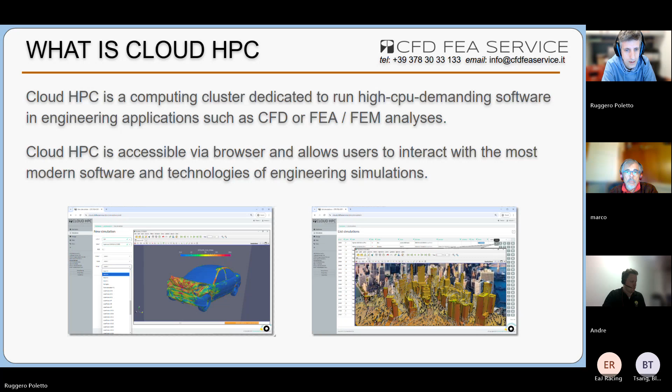So a couple of words on CFD FEA Service. We are an Italian-based company founded in 2018, and we started this service that we call cloudHPC in 2020. It's an HPC on demand. So it's basically a cluster where you can perform any type of CFD or engineering simulations with quite a wide range of software installed already in the platform. MantiumFlow and consequently OpenFOAM is one of the software installed in the platform, but it's not the only one. There are possibilities to perform FEA analysis, impact analysis, thermal analysis, and so on and so forth.

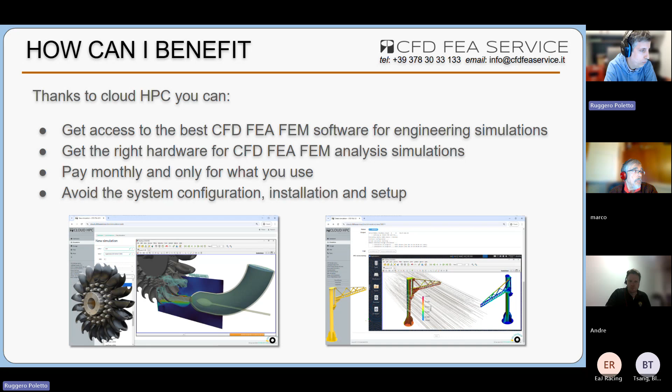The whole platform is a sort of pay-per-use system. And in the past months in particular, we worked very hand-in-hand with Andre in order to give the possibility, if you generate a simulation with MantiumFlow, to get the data, import them on cloudHPC, and run the analysis on cloudHPC. And then once the analysis is completed, download the results of the simulation.

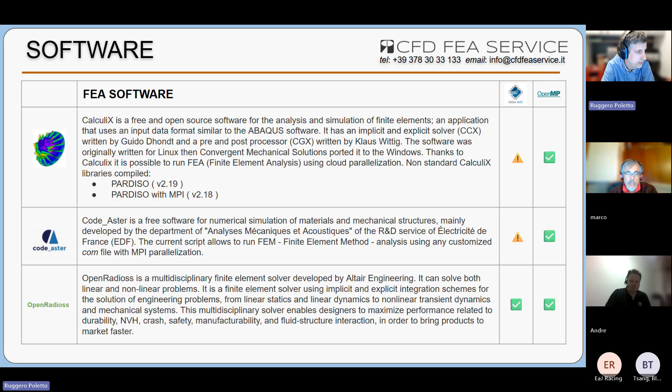So if you have troubles with any of your simulations with this software, you can write us a message and we can provide support and assistance in order to understand what the problem was. And then many others. Just talking about SU2, another CFD software, Salome Meca, which can be used to generate meshes, EnergyPlus, Scilab, TensorFlow, if you're a Python maniac and want to implement your own Python script or artificial intelligence sort of thing, TensorFlow or PyTorch are installed. We have ParaView and several other things.

But obviously, the main topic today is going to be MantiumFlow and the Mantium Challenge. I think this is the second year we are working with Andre, and we provide the hardware. So what happens under the hood every time you submit a geometry is that Andre generates what I personally call the OpenFOAM dictionaries. So the setup of all your simulations. So every time there are 8 to 12 participants, it means that Andre generates about 10 different simulations that are going to be performed on cloudHPC.

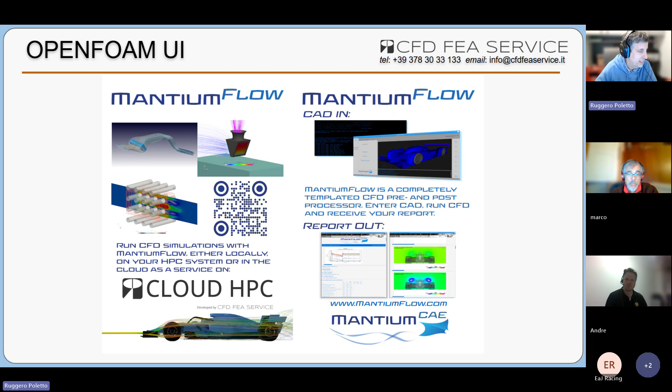Using the setup provided by Andre, the system generates the lift, the drag coefficients, and the heat transfer coefficients that are then sent over to another simulation software in order to evaluate the lap time. So every circuit has a sort of target values for lift, drag, and heat transfer coefficients, and the closer you are to the target value, the faster you'll be on the track.

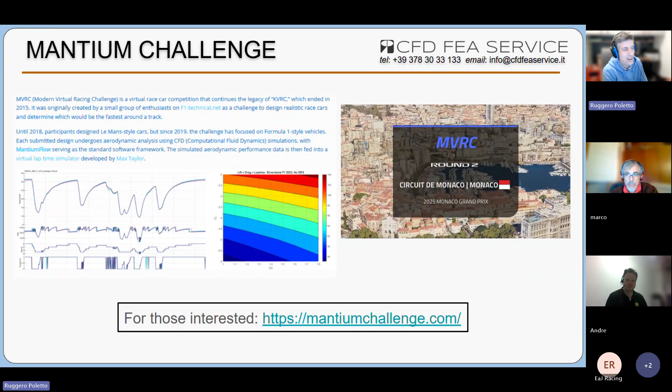So yeah, Mantium Challenge is a teamwork. This is the Monaco Grand Prix that has been performed earlier this year. I think that for every Grand Prix, Andre, correct me, but there are at least 5 to 6 people involved to generate the results, to generate the video, to calculate the lap time. So it's like a little community that all together provide some sort of service or capabilities in order to complete the simulations.

That's actually correct. It's a bit sad that we lost our guy in Australia, but the data does travel the world. So it arrives with me in Germany. I send it to you in Italy to get calculated. Then there is also technical scrutineering. We have help from Denmark, the lap time simulation in the USA. So the data does quite the travel.

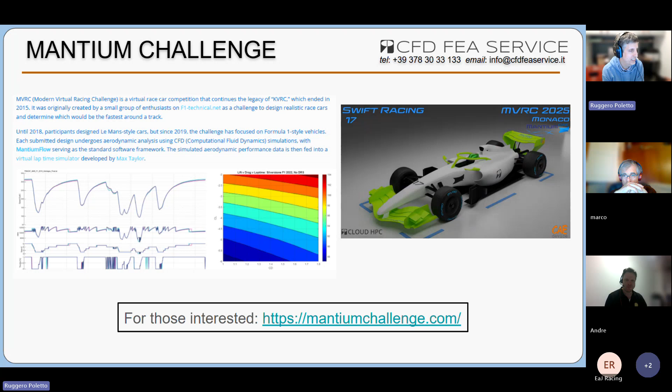It's really teamwork. I mean, Andre is great because he's coordinating all these entities, each of which does a little piece of the Grand Prix calculation. So congratulations to Andre and to his commitment to making the Grand Prix and this challenge real every month.

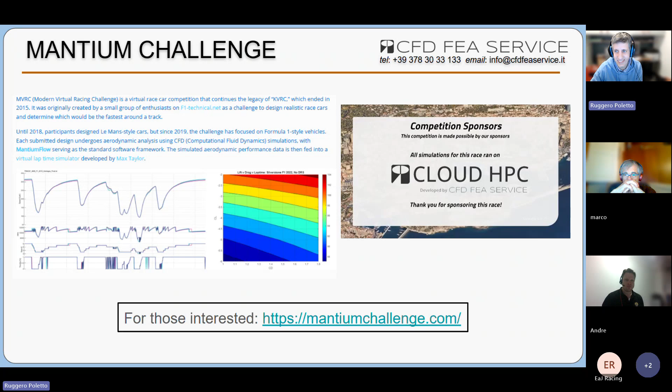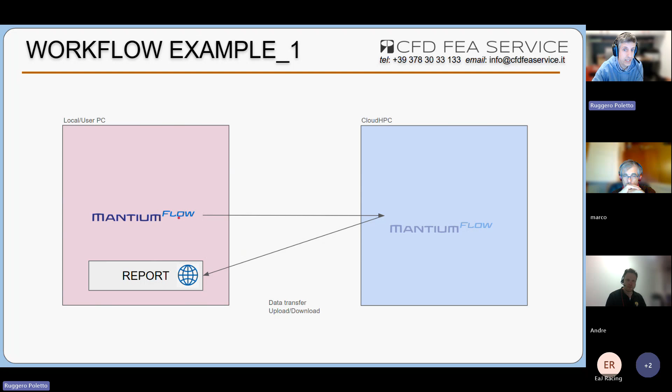Obviously, I need to generate the geometry. I need to upload that in MantiumFlow. And using that, I need to elaborate an OpenFOAM case. This OpenFOAM case is transferred on the cloudHPC. Sorry, I just do this. So CAD file, we upload it on MantiumFlow. We elaborate the setup of the simulation.

We can transfer it on the cloudHPC, where there is a combination between OpenFOAM and, it's grayed out, but there is also MantiumFlow. They are used to simulate, so generate the mesh, simulate, and that's the OpenFOAM features. And then there is a customized installation of MantiumFlow that is there to generate the report. So all the images and all the Excel files, CSV files, that are then used to extract the lift and drag coefficients for every car.

This report can then be downloaded on the local computer, and Andre then takes it and sends it over to the USA to calculate the lap time or to do his activities. So the workflow starts with a CAD, MantiumFlow, still on your local computer. You transfer everything on the cloudHPC, you submit a simulation, and then you can download the report, I mean the results of your analysis.

So these are the 2 blocks, local computer and remote hardware resources, and these arrows represent the data transfer. There are 2 main data transfers during the simulation. One is right after we set up the simulation. We upload the OpenFOAM configuration files on the cloudHPC, and the second one is once the simulation is completed, we download everything on our computer just to get the results to post-process them locally.

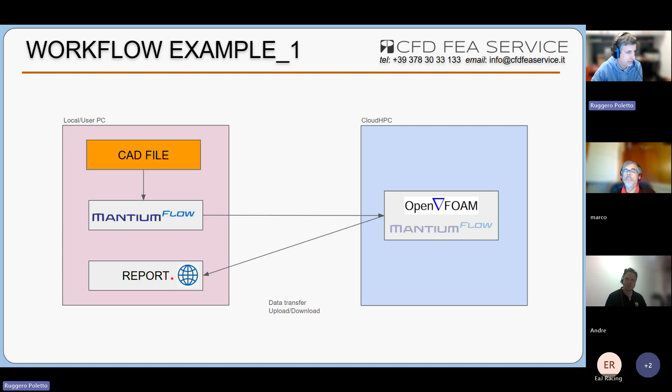All this data transfer, let's say, can be done in 2 or 3 ways. There is what I call the manual way. So using the website, you just upload the files or download the files. There is a procedure to do them via terminal. Another way is through the API, and I think with Andre, we are working on that in order to embed these API calls directly in MantiumFlow so that the user will be able from MantiumFlow to submit the simulation.

And in terms of hardware provided for every simulation, basically there are two different types of hardware. There are AMD EPYC Milan processors at 3.3 gigahertz, and that's what we call high core. And then there is the premium processor, which is the Intel Xeon Emerald Rapids at 4 gigahertz. It's about 50% to 100% faster. So this processor is like a generation beyond the first one. And this allows users really to speed up a lot the simulations.

AMD EPYC Milan has been around since 2022, I think, so 3 years ago. It's not the most recent processor, but generally, compared to the processor you may have in your computer, it's about 20% faster. It depends a little bit on your computer capabilities, but this is just to give you a ratio. So AMD Milan is a little bit faster than your computer, and Emerald Rapids is definitely a premium processor. It just came out in 2024 and will be soon replaced by EPYC Turin, which is the 2025 version of the processors.

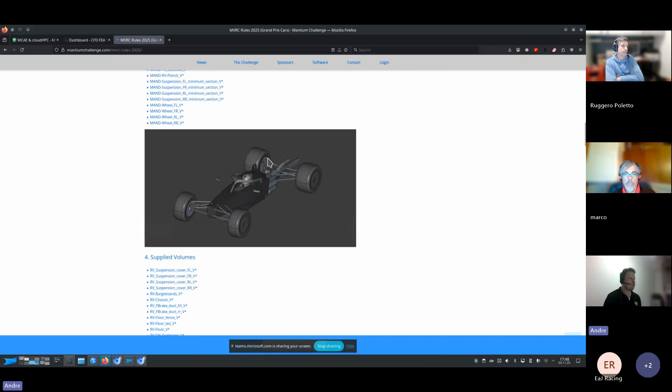We have some regulations on how you can design parts onto the cars, and there are all kinds of volumes, but to say it in a very simple way, you have to cover the internal parts and not have body parts sticking out of these reference volumes. Very simplified. At every race, a bunch of teams submit their CAD geometries to me, and they've been doing CFD simulations on them.

But now I get them and I do the reference simulation. I extract values such as lift, drag, lift balance, cooling performance, and that later goes into a lap time simulator. And for those that are not familiar, you could now download this CFD software, or actually the pre and post processor that Ruggero was talking about, called MantiumFlow.

You download it here at Files. Here you can download the CAD parts you would need for the challenge itself. However, there is also a webpage, mantiumflow.com, where you can just as well download MantiumFlow. The download button is maybe not that exciting, but you also have a bunch of tutorials.

MantiumFlow, it's kind of a misconception that it's only to simulate cars. Cars have a lot of complex parts, fans, rotating parts, porous media, and so on. So if you can simulate a car, you can simulate anything. Anyways, let's get to the actual script. So this is the graphical interface of MantiumFlow.

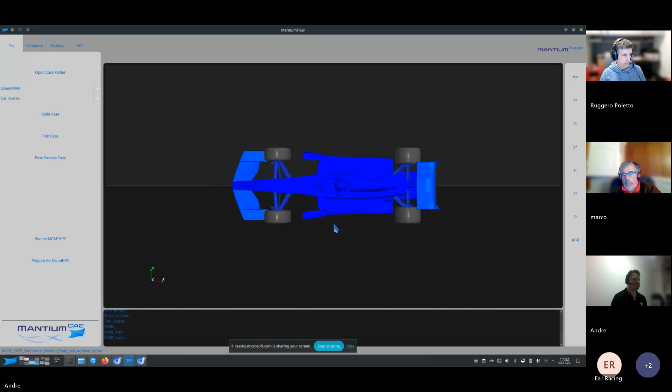Where is it? Oh, it's already this one here, webinar demo. Yes. So now you can see it has loaded the geometry. It colored it based on what type of a geometry it is. So nice enough, wheels are dark. You can see normal geometry has different colors of blue.

And now I happen to know that the lighter blue is a high resolution surface. And this blue here is just a normal resolution surface. This green is a special boundary condition. Here in a Formula One car, you have an air intake.

Now, the main idea behind MantiumFlow is you now tell it what you want to simulate. If you just download MantiumFlow, you will already have a bunch of templates. And among them are these MVRC templates. I will just choose the normal MVRC template.

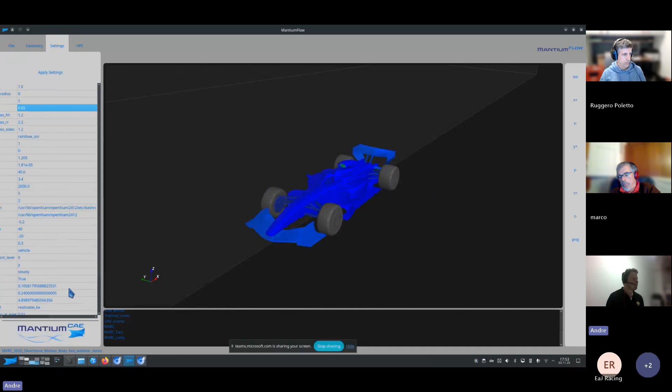And I could now click Build Case, and it will build the case so I can run the simulation locally on my computer. But if you don't like automated workflows, or you happen to know that the MVRC template just takes too long for you, you can also go into the settings. And let's say one major driver of simulation length will be determined by the mesh size.

And one of the settings to change the mesh size would be the base cell size. So I'll just increase it. Another one is how many iterations will you run? So let's say we've run this car a few times. We know we don't need that many. So let's just decrease that as well. And as a MantiumFlow user, never forget to hit the Apply Settings button.

And now we can go back here and we could build our case and run it locally. But we're here with the great sponsor of MVRC, our technical provider, cloudHPC. What we do is we say, prepare for cloudHPC. So I click that. It tells me it will prepare the case. We have to zip it up and then we can send it there. So we just hit prepare.

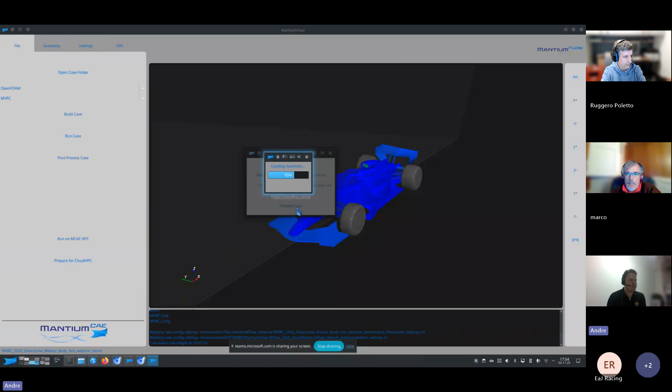And as Ruggero mentioned, obviously I need to build a direct API, so we don't have to go through this manual step that we will now do together. But it also depends on user demand. So let's see what happened. We can see now it created these other folders. So there's a system, a constant, a 0, and a postprocessing.sh file.

As a user, if you don't care about OpenFOAM, you don't have to worry about it. But if you are interested in OpenFOAM, here you can see, for example, the boundary conditions. This postprocessing.sh is a script. In this case, it's a script relevant to Ruggero's system, cloudHPC. So these commands are made for his system. If you just run them locally, they will probably not work. You would have to click build case and you can run it locally.

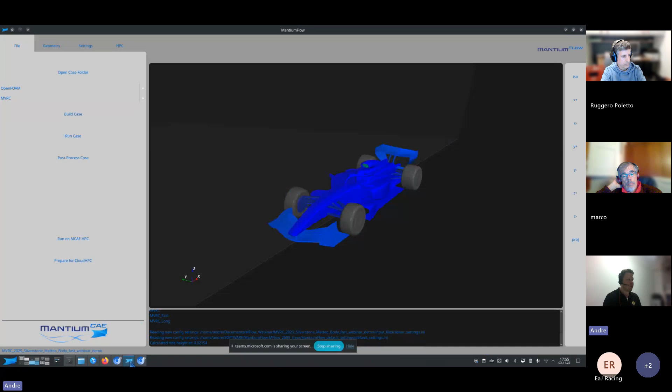Anyway, the system did tell me I can now compress this. So I'll do a tar.gz. That took surprisingly long. It's only 27 megabytes. So how can I now submit this simulation to cloudHPC? Well, I go to the cloudHPC system. I'm already logged in. And this here is my dashboard.

And what you can already see here, I guess Ruggero would later maybe tell us a bit more, but I can see here we have some simulations that I've conducted. So here you can see simulations from the Monza 2025 race. Over the weekend, to prepare for the webinar, I also simulated a case because I wondered what would happen with the simulation time if I increase the mesh size a bit and reduce the number of iterations.

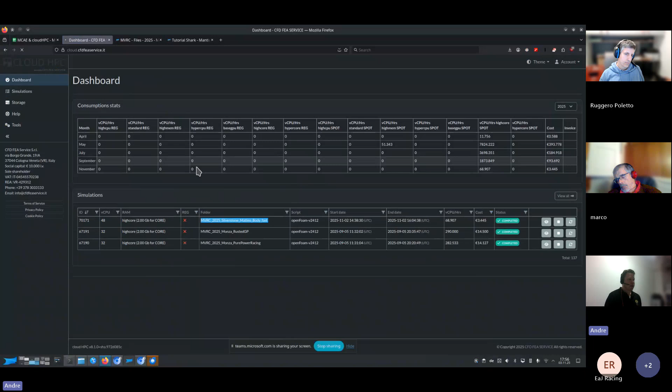So how do I submit my case now? I go to storage. Wait a second. I upload that zipped file from a second ago. No. There we go. Or no. Just do it again. Okay, there we go. Okay, 13 minutes, I don't believe it.

Okay, so now we've uploaded the case. How do we submit it? Here you can see once more old simulations. So you see we create a lot of simulations. They usually all execute in parallel. So that really helps with conducting the race weekends.

So all we now have to do to submit a simulation is we now select the CPU. How many would we run? I usually run 32, 48 because the MVRC simulations are simply not that large. They are maybe in the range of 8 million cells. So we do have to keep a balance of accuracy and approachability. Many contenders use their laptops.

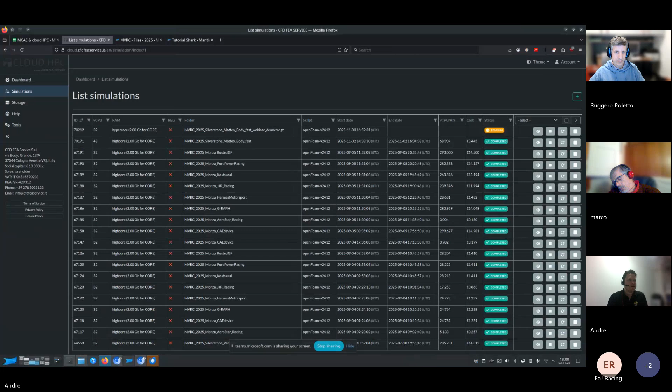Ruggero, maybe if you want, you could log on as me and show how we could monitor that the case is running. Okay. Obviously, it takes a few seconds. Let me see what else I wanted to tell you. Yeah, maybe Ruggero wants to demonstrate a little bit how we can monitor the case, or we just go right to the next step. If you give me a second, because it's still pending, there's not that much you can show right now. It takes about 2-3 minutes for any simulation to actually start. There is not really a queuing system, but there is just an allocation time for the simulation.

So I'll share my desktop. Okay, you should be able to see it. Now I'm basically following up the Mantium CAE account, so I can see all the previous analyses that have been performed in the past months for the old Grand Prix, and this analysis that's running right now. It is still pending. It takes still 1 more minute, so we'll be patient, and then we'll see what's happening.

In here, there are some controls that can be used in order to interact with the simulation. For example, if you see that the analysis is going completely wrong, you can stop it. So there is a stop button that allows you to soft stop, which means complete the current time step and save the results, or hard stop, which means completely cancel out the results as quickly as possible.

You can synchronize, because when you submit a simulation, the results are meant to appear in your storage, but they will appear only at the end of the simulation. If you are at an intermediate step and you want to download the partial results, you have to click on the synchronize button. There's no other option. And then there is this view button that allows you to enter the details of your simulation.

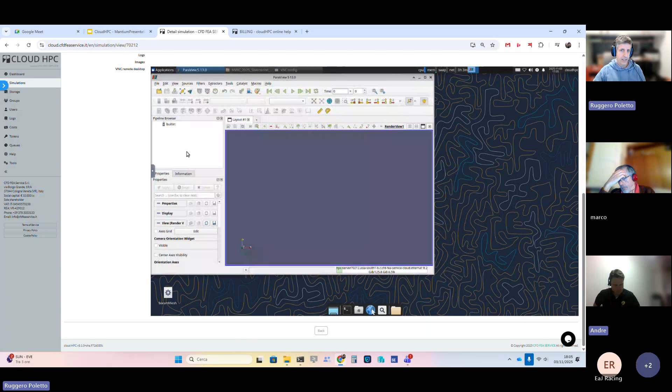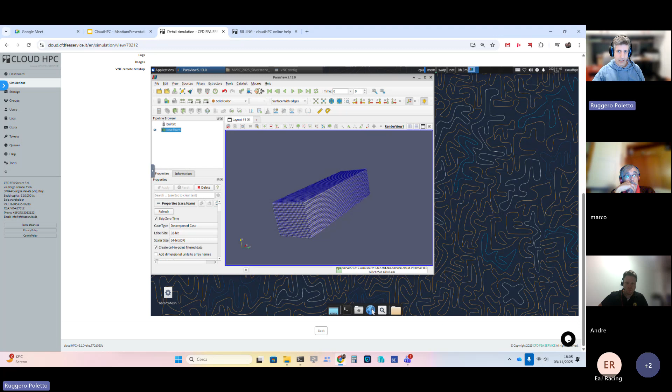You can enter here and open the logs. I think snappyHexMesh is the log file we're generating here. You can have a look at what Snappy is actually doing—that's feasible at any time while the simulation is running.

And on the output you get feedback. In here it says Snappy is running with 32 processes, so 32 cores. Once Snappy completes its mesh generation, it will start the CFD part.

The process here is quite automatic, and even if we don't do anything, in the end we'll get all the results saved in our storage page. So there's no need to come back and do backups or anything like that—everything is performed by the system.

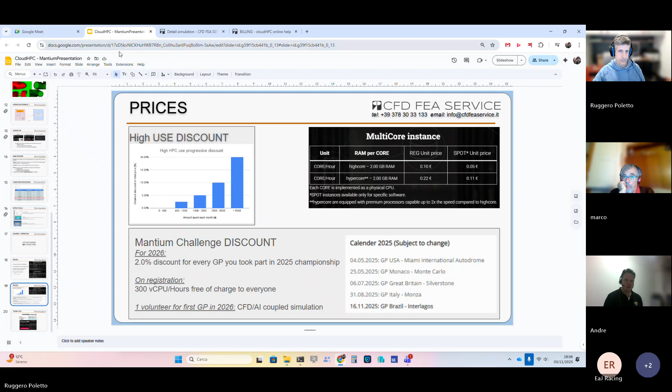Maybe I can show how to download the results. I'll let you do it, because I don't have results in my account.

Okay, so my screen is back. Anyone can see it? Yeah, I can.

Okay, great. So after you submit a simulation—for example, yesterday I did a test simulation—you can see here it says 14:38 UTC, and 1.5 hours later it was done. I would like to download the results.

And MantiumFlow can do more than just prepare a CFD case and help you run it. Let me show you what it does.

Let's wait a second more. Yeah, the storage can slow down a little bit depending on the number of cases saved on the storage.

So what MantiumFlow does when it's finished is completely post-process your case. The entire post-processing is also automated, and you can imagine running a challenge like the Mantium Challenge—you want everything automated, because I want to be fair to the competitors. I don't want to make a mistake and get incorrect results because I did something wrong.

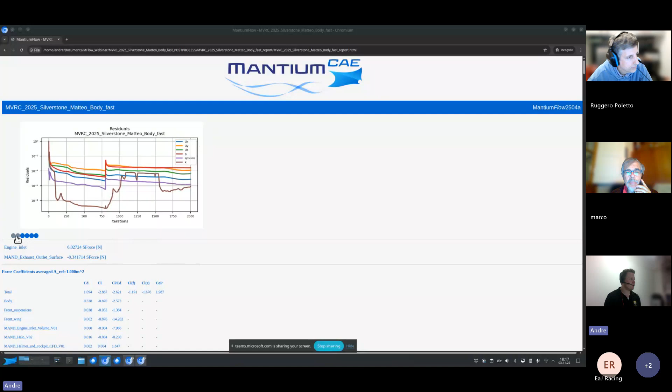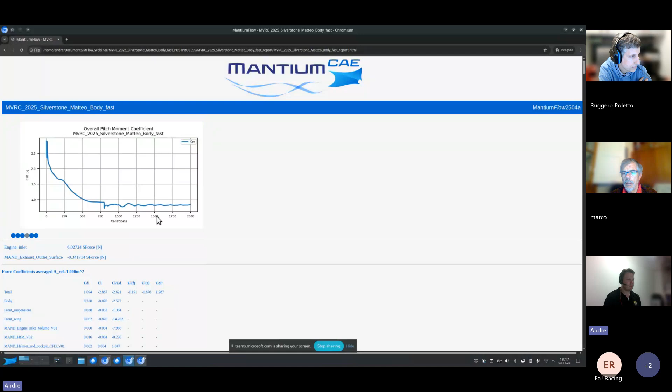So you can see all kinds of plots. In this case, a very interesting one is the overall pitch moment coefficient. That's on the MVRC cars what usually converges the slowest. So in this case, I said let's do 2,000 iterations, but maybe you want to speed up things and save a little bit of money, and you know your car. In this case, maybe 1,500 would be enough. That's what you get to know thanks to such kind of plots.

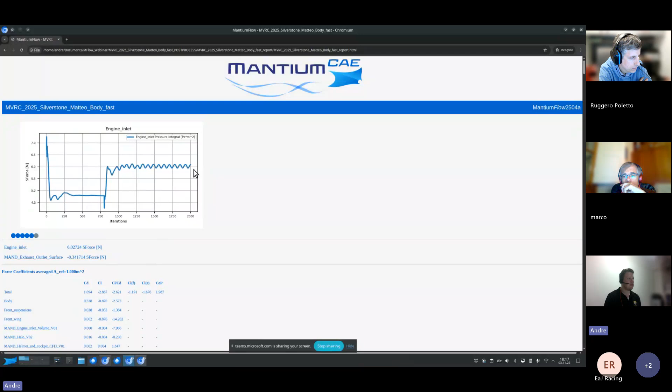As you can see, the other ones kind of converged. This is pretty often the case that the engine inlet isn't perfect, but you can see it fluctuates around some kind of mean value, and MantiumFlow actually does not just give you the end result of any plot. It automatically detects where it should average.

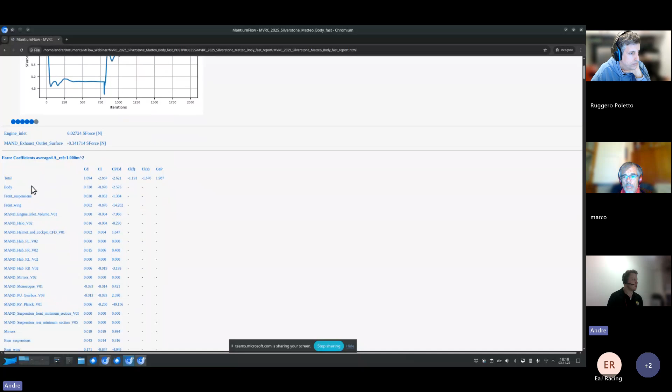So yeah, you can then see some numbers. In this case, the exhaust surface, the forces on the parts. A nice feature is if you don't know what a part is, you can just hover over it and you'll maybe get reminded what it was. In this case, the things seem to be named nicely, front suspension, front wing.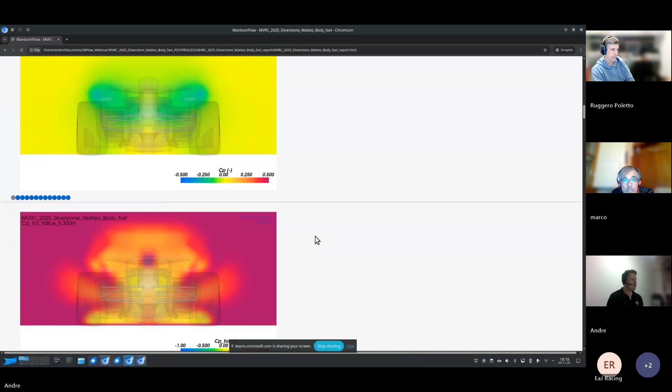So all kinds of slices, in this case indicating the pressure range. We have the same for velocity. Now here you see the same with slices in the X direction. And then all kinds of 3D images as well.

So here you see what you would find pretty often. Let me find a nice view. These kind of total pressure zero isosurfaces, which often help to detect areas of drag. You get automatically all kinds of streamlines.

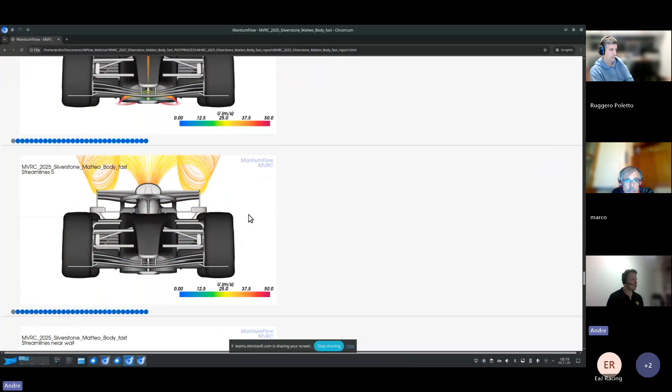And then also surface related post-processing. In this case, near wall velocity streamlines.

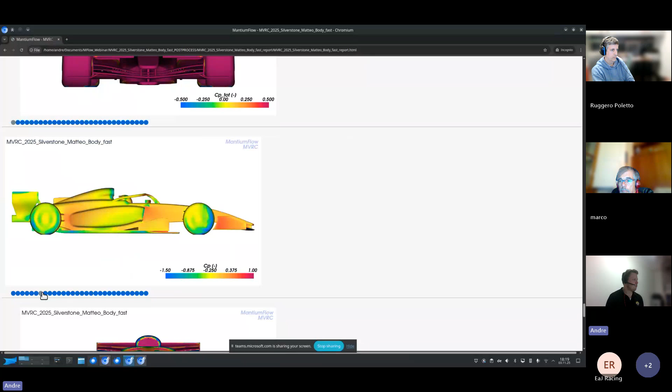Here we see the total pressure on the car. What you want to see on a car generating downforce is a lot of red on the top surfaces, because that means you're pressing down. Let's see if we can find the lower surfaces. Here we find a little bit of the floor. Here you want to see blue, because that means you're sucking it down. So this car only has a little bit of blue around the diffuser, and here this leading edge and the front wing.

Yeah, that was the report I wanted to show you. I forgot if I have any closing remarks. Let me just pull up my notes. No, that's basically it from my side.

You've presented what we are doing for the MVRC competitors. I also support it in the whole challenge. Mantium Flow is free for everyone. And maybe also to explain, right now you can do Mantium Flow, or you will be able to do simulations on cloudHPC with Mantium Flow, for the MVRC championship. We're working very hard to make it generally available, and I'm very hopeful to do it with the next release of OpenFOAM, which should be in December. So in December, everything should be open for everyone. You can simulate whatever you want, including thermal simulations.

So that's it from my side. Thank you very much for listening. Thank you very much to Ruggero, great technical support and fantastic sponsor of the Mantium Challenge. As I said, I'm looking forward to next year, in particular for the coupled CFD AI simulation, to see if there is a real benefit out of it, because I think it can definitely be a good test for everything we put into this particular tool over the past months.

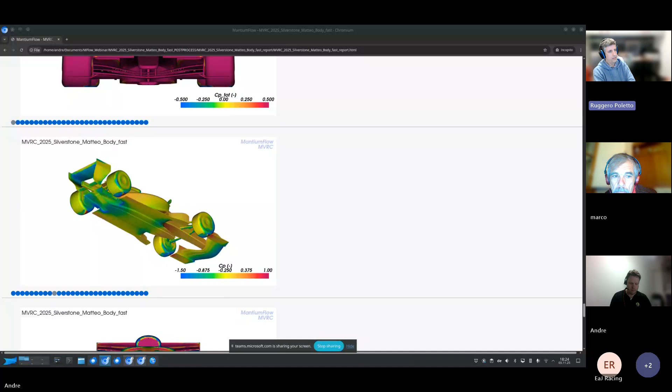For example, in civil engineering, the platform is quite used for fire simulations. Sometimes they simulate a whole train station, a whole underground station. For that particular big project, probably the hardware resources they have in-house are not sufficient.

Or there are some companies that have headquarters in 2 or 3 countries, and using a platform like this, they solve the whole data transfer between the several departments, because users can log into the account and check the simulation setup and performance from several locations.

The whole platform is ISO 27001 certified for data safety, so you get this certification or proof of safety in this regard. And the customers are as well from all over the world. We have more than 3,000 users from North America, Europe, Africa, South America, Asia, Australia, everywhere.

Okay, thank you. You're welcome.

What's different, probably Andre, and then we close, is compared to other software, we provide automation, which is the word everybody says, but also we provide support. In the last 2 years that I've been in touch with Andre, we exchanged tons of emails every time there was an issue with the simulations on cloudHPC for the Mantium Challenge. We got real-time support from him and vice versa. That's another big advantage of the team made out of Andre and myself, of the 2 companies. From what I understood, that's quite a big pro.